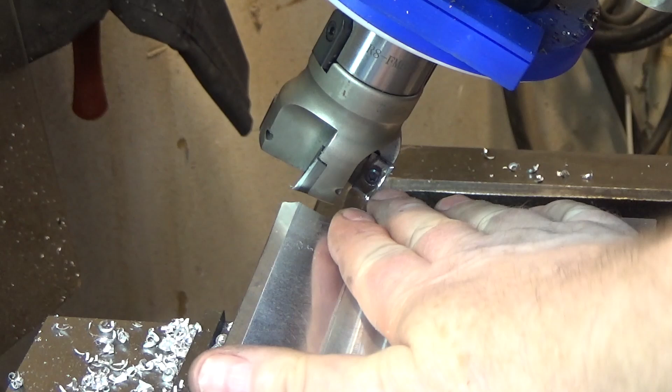All of that adds up. Fortunately, none of this is precision. This is all a prototype and rough, so I think we're gonna be okay. So I'm just gonna keep going this way, until we've got the material off that I need. When I'm finished with this side, I'm just gonna flip the part around like that and do the same thing. Then we're gonna drill holes.

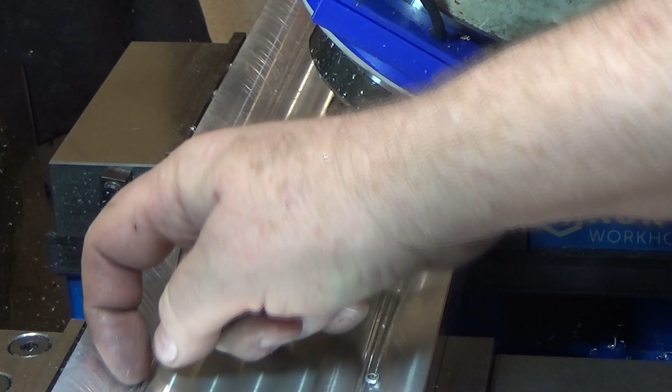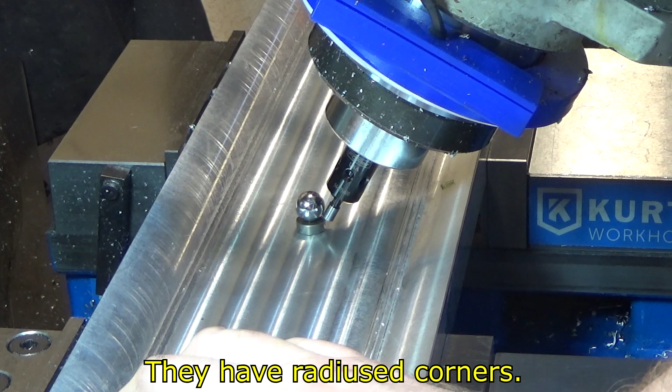Trying to find the center of this side here. I scribed a line using a caliper just off of the ledge I created by cutting, but I don't know how flat that ledge is because those inserts don't have square edges, so it may not be very accurate. It doesn't look like it's particularly accurate, although it's not supposed to be centered here. It's supposed to be centered on the hole, which is biased to the very edge of the conveyor.

So I've got a tooling ball in here, a half-inch tooling ball. That's why I drilled that small hole initially. I'm gonna have to go back and drill a 3/8 hole after. And the beauty of the tooling ball is the center of the sphere is equidistant from all points on the sphere. So left, right, I found dead center.

And then I brought my electronic indicator up to just touch the tangent line and then compensate for its diameter of 0.2. And I know based on the CAD drawing that the distance from here to where I want to drill over here is a horizontal distance from that tangent point. So let's see if that's an accurate approach.

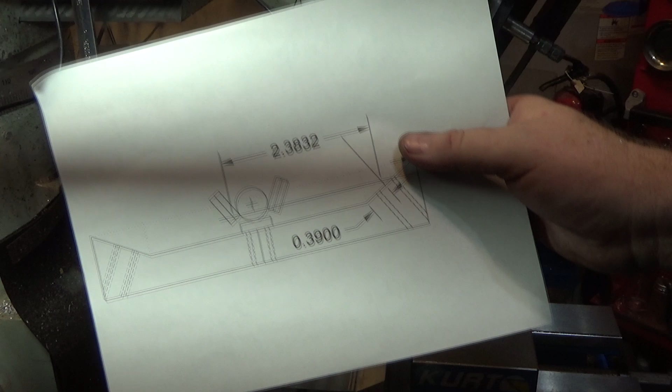So I've got my zero. Now let's go over and see if I can find the tangent, if I can find that point. When your planes aren't set up right - I just found my first mistake.

So normally this indicator is 200 thousandths diameter, so you move over 100 thousandths, which was what I did in order to find the center line. But actually you move over the distance on the 30-degree plane, which is longer. I got to go figure out what that is, and I'll be right back, because this is not lining up right, but that's why, I'm pretty sure.

I was killing myself here. So I got my indicator just on the bottom of this guy, set my zero. Then I compensated for the thickness, and then made up for the fact that it's not 100 thousandths, but when you go at an angle, it's longer. It's 115.5 thousandths at 30 degrees.

And then I ended up wrong. I kept figuring out, why is it wrong? Some of you might have caught it, but there it is.

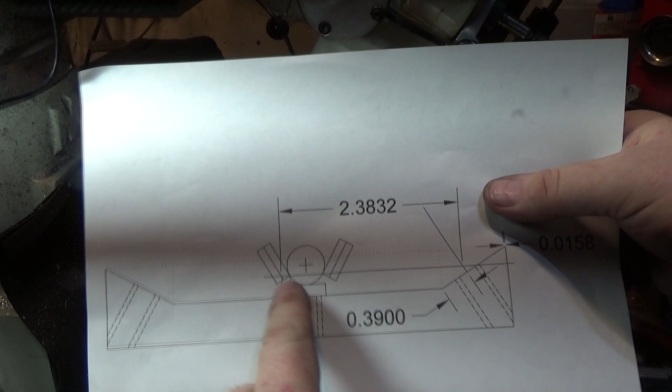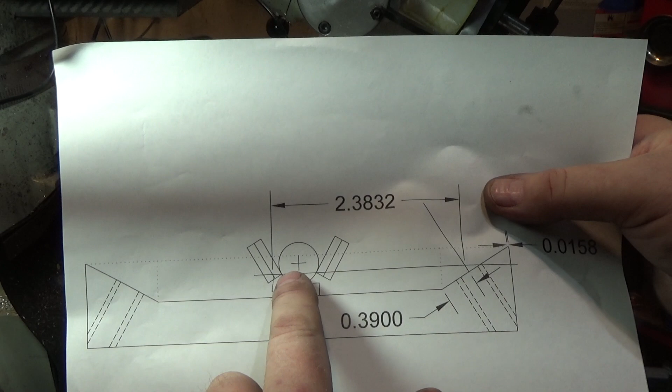I set my distance from the intersecting point between the tangent and the center line of this, over to where the center line would be on the other one. So when this center line is in this location, it is tangent with this circle, which is the half-inch tooling ball.

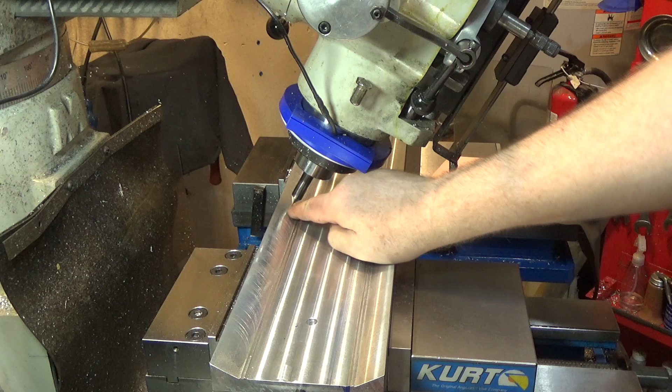And then move over 2.3832, and the center axis of this will again be on the center of my hole, which is right on the scribe line where I measured from the bottom here. And that was really a rough measurement, but it's really close because the scribe is right on there.

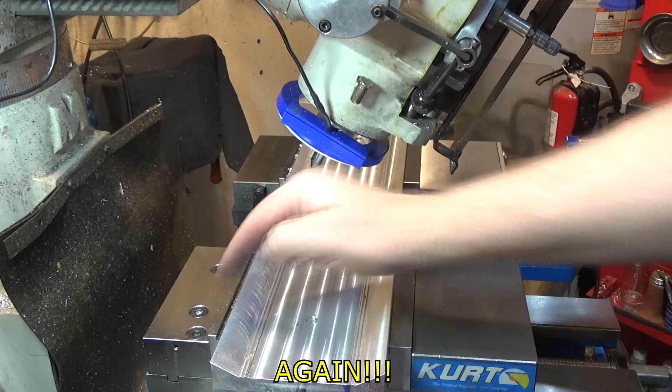Always check your work - every time I don't, I get punished. However, what I didn't do is lower the table enough to fit the chuck in here, so I can actually drill the holes and tap these parts. As a result, I've got to lower this down, and when I lower this down, all my measurements will be wrong. But at least I know the line that's scribed there is very accurate.

All right, so I can't drill all the way through this, or I'll end up cutting into my parallel or my vise, because it's going to come out right through this corner here. So we've got to do blind holes, and we're going to go 675 thousandths deep. Unfortunately, my quill DRO is hard to read because it's way down.

That should be the last thing I need to do at 30 degrees. I thought about adding the intermediate holes that go every 3 inches, but I don't think they're necessary. There's not a ton of force on this part, so I could always update it later if needed. These are 3/8 inch bolts, and there's not a ton of weight here, so I think it'll be fine.

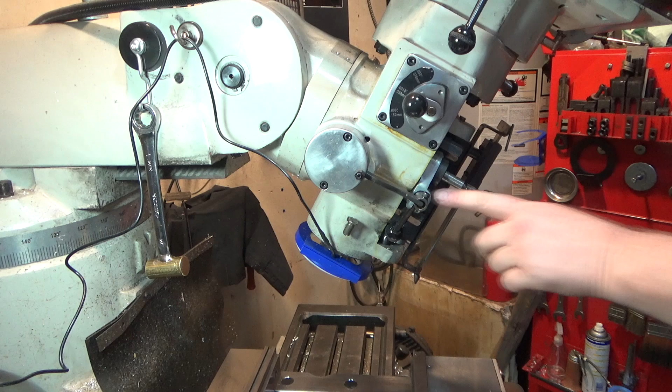Time to retram the head, but I also have to pull the column back. I don't normally leave it this far forward.

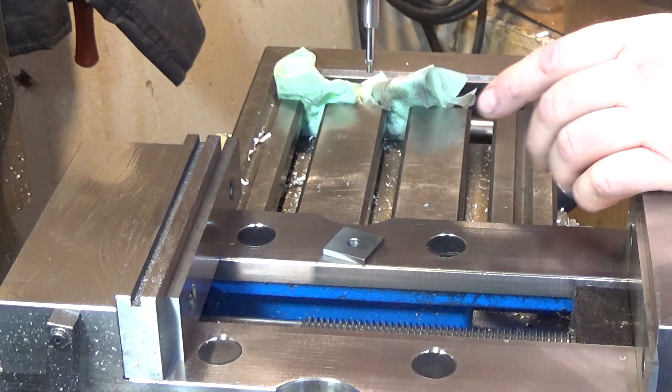I don't know how much you'll be able to see this, but to tram in my head, I use a square gauge block as my reference.

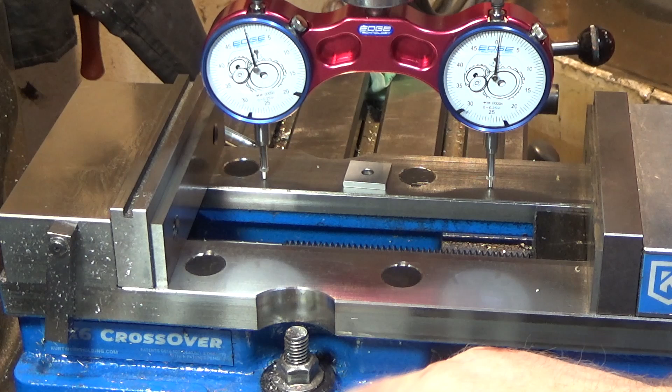It took a ton of back and forth between this orientation and this orientation in order to get this close. This way, it's within half a thou, and you can see that just leaning on the vise is enough to shift that, and that's not even that much force I'm putting on there. So I'm going to leave that be, because just tightening the bolts throws it off that half thousandth even when I try different patterns. I get it right on, then it's off, so I'd have to compensate and figure out how to get there.

This direction, it's within like 2/10, so I'm going to call that good, and we'll move on to the next operation, hopefully the final.

All right, next up, we're just going to remove these little high spots and relieve this section. We're going to go below the base here by 25 thousandths.

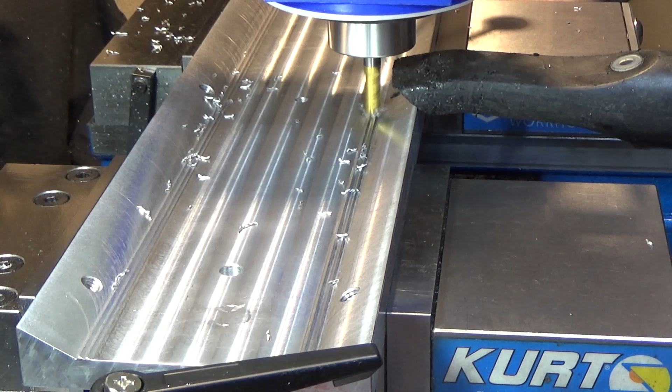Second relief cut, that's it. The last part should be done. Now we just need to assemble it.

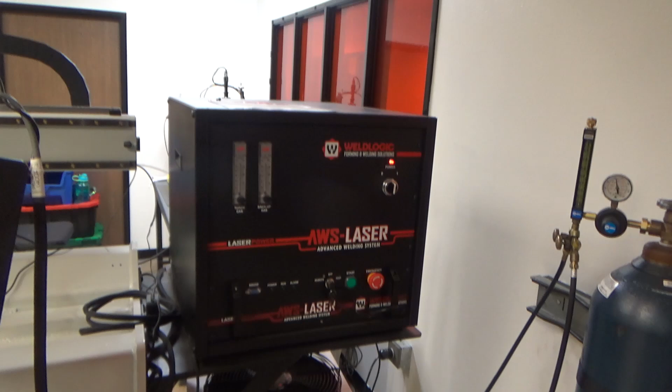Well, deburr and assemble. Here's a quick video showing one of the seam welders. This is a smaller one. The top unit is the power pack, and the unit below that we just looked at is the chiller for the laser, because they all require it.

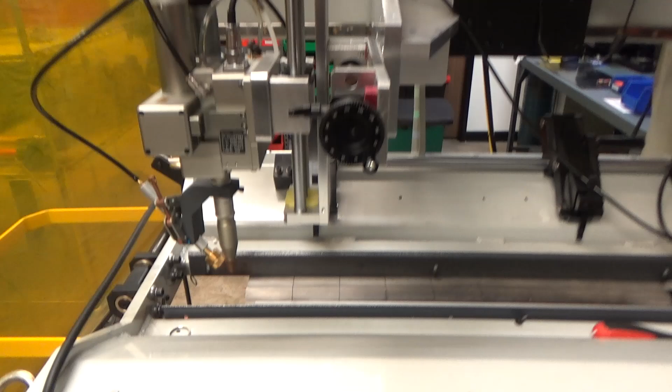There's the WeldLogic control panel with their software. There's a camera that shoots straight down the same pipe the laser is shooting down, so you can see exactly where you're shooting. There's the fingers that hold it down, and the argon sprayer essentially, and there's also argon that goes through the head of the laser to cool it and clear.

Then there's some adjustments on the side of the laser to choose, because there's a galvo head on there, and it lets you do wobble. And this is underneath, and this is where the lift guard goes, although that's going to rotate about 90 degrees, as you'll see in these still shots I have after of the completed assembly.

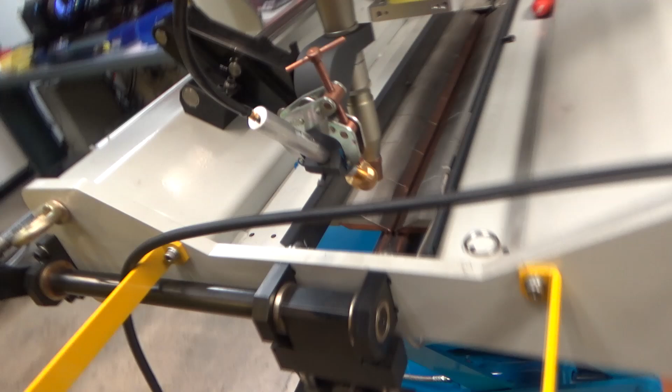So the clamps are up top here. That's those copper fingers, and it's sort of like a finger brake. Those clamp down, and then the welder goes right down the middle. The reason they use copper is because there's a ton of heat they got to get rid of.

And also underneath, you can see a hose that feeds argon to a channel so that the back of the weld also is covered in argon.

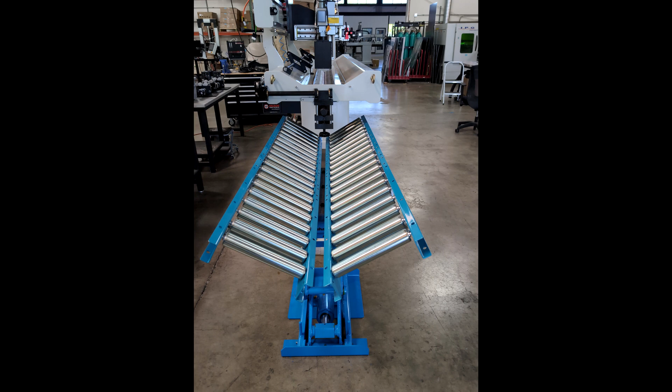Here you see the two gravity conveyors mounted onto the lift table. You can't see any of the stuff I made because it's all underneath the gravity conveyors. The next shot will show it.

This whole assembly is ready to slide under the 6-foot seam welder, and it will support cylinders between 6 inches and 32 inches, although they think they want an additional piece that goes across the top that you can press smaller cylinders on. By top, I mean across the top of the gravity conveyors, there'll be a plate that goes across that can push up small cylinders.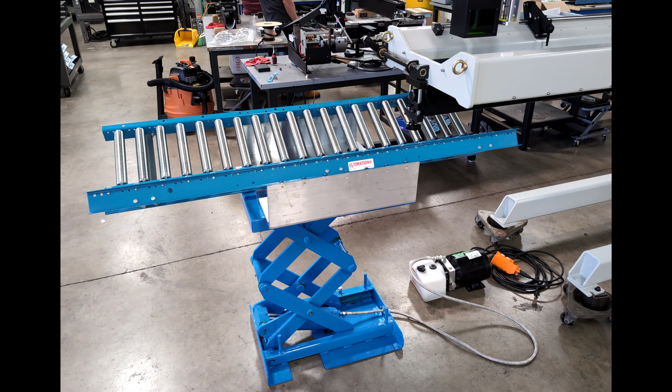In the side shot, you can see the angle plates mounted, and then that weird shaped 1-inch plate is in between the two gravity conveyors, so it's still hard to see even from this angle. I think they could really benefit from a nice coat of paint, but this is just a prototype to see if it'll work. By the way, this is a hydraulic lift table with remote control.

Pretty nice. Next up, I can highlight some of my screw-ups. Here is the 3/4 inch end mill going into the material and stalling out and spinning in the holder.

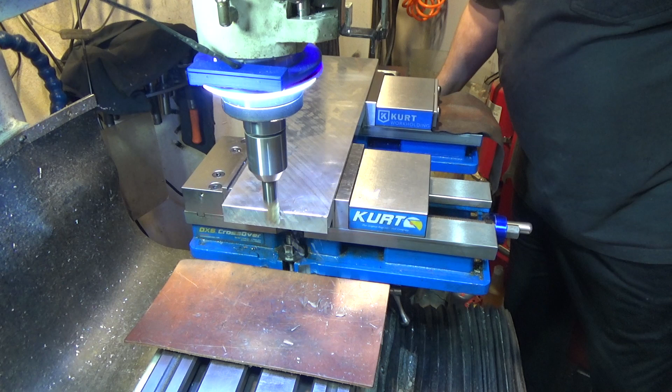Remember I said I never had a problem with that? Well, as soon as I said that, I knew the machining gods would punish me, and they did. It freezes up. Not very good.

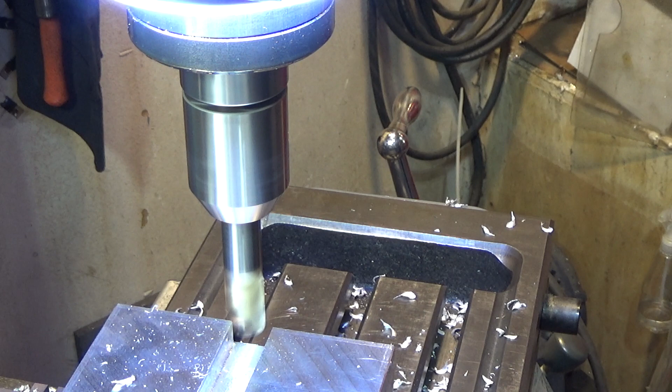And as if it wasn't enough punishment the first time, we might as well go for a second time with an even smaller bite. The first time I was trying to take the whole thing. Second time, only about 0.38 inches.

And there we go, which actually has enough force that it pulls the entire head assembly of the mill out, and I have to reset up everything. Pretty awesome. And I'm really lucky it didn't damage the part worse than it did.